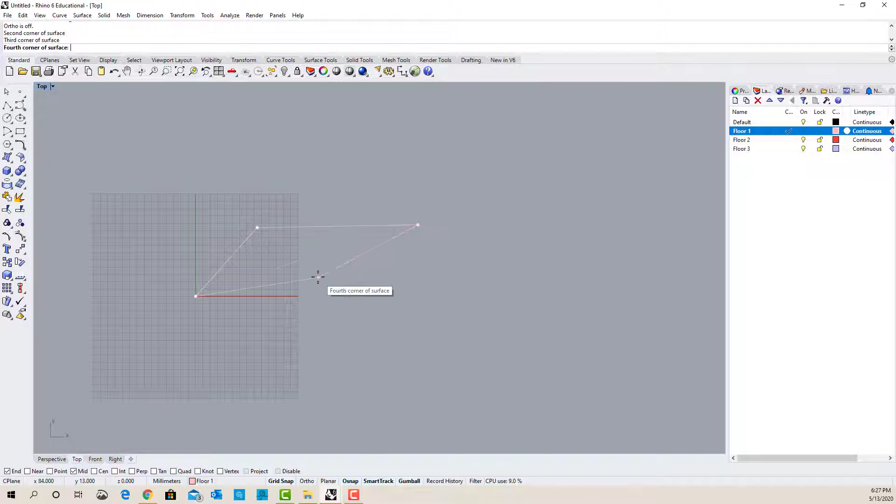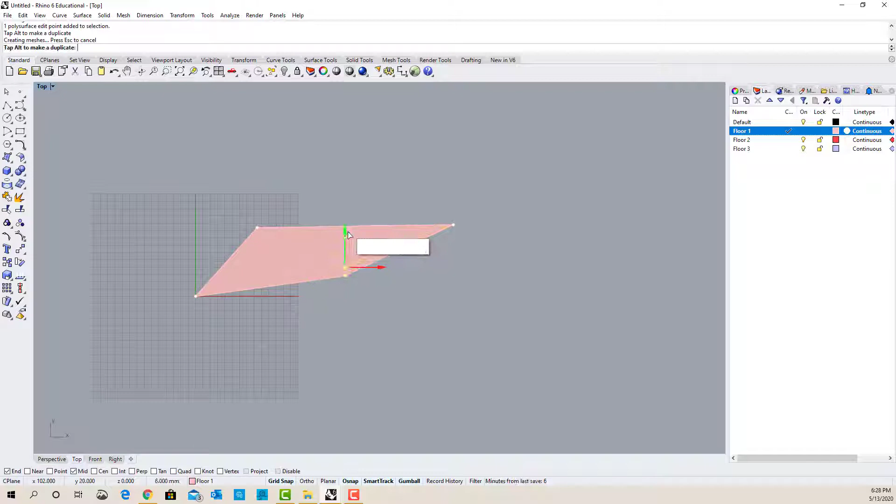Here's the first shape, and I'm calling that guy the first floor, of course. Solid, turn on points. I think I'd like to stretch this out a little bit more, make it more dynamic. A little bit longer, so the proportion is more of a 3:1.

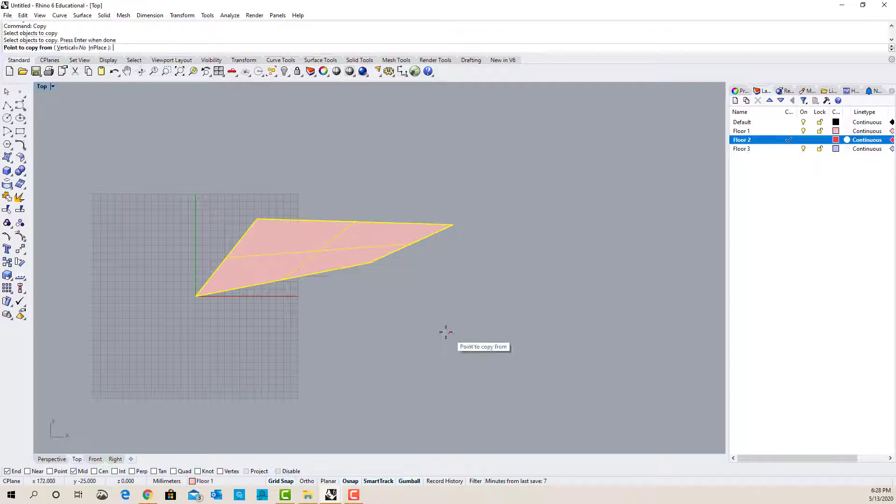Next, I'm going to go to second floor and still draw in the top view. I'm going to copy the same guy, and no matter how I move it, all those sides are going to be parallel, but I'm just going to concern myself with making these two sides parallel. Let's go ahead and change this to floor number 2.

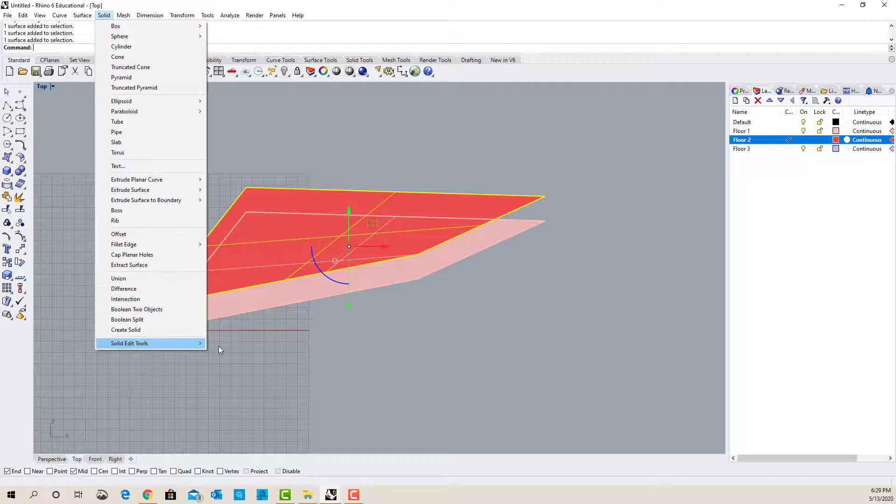Now you can see them both on top of floor 1, floor 2. I'm going to keep these two parallel, so I don't mind distorting the second floor now. Let's go to solid, turn on points. I'm going to grab this point and stretch it out a little bit like so, making it a little different from the one below it.

And go ahead and stretch this guy this way maybe. Okay, and I still have a pretty dynamic shape right there. So maybe this is where that is. I'm just teaching you a technique, not design, just a method of how you can do your 101 design.

Next, I'm going to go ahead and copy this guy, same thing. I think I want to make this edge parallel right there, so I'm going to offset it a little bit like so.

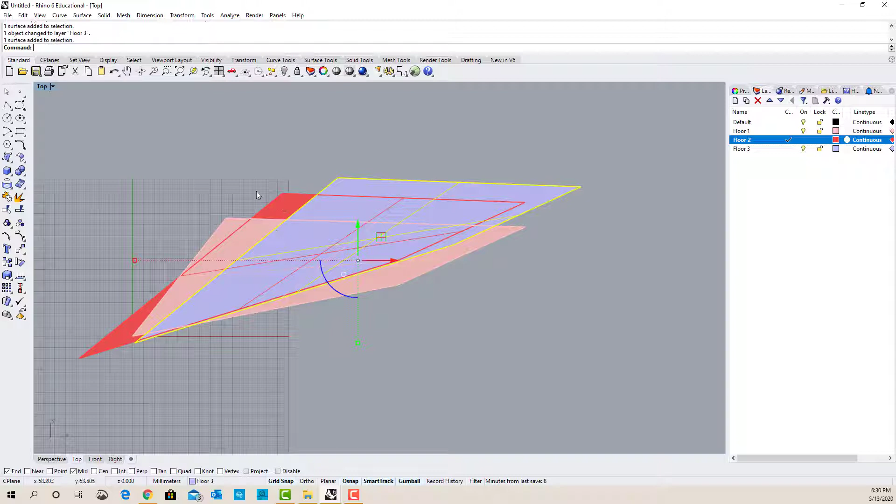Okay, let's grab the last one up and make that into floor 3. I'm just making different colors as a technique so I know which one is which level when I look at my index right here, which happens to be my layers. Grab the third level that you made and make it a slightly different shape from the second level.

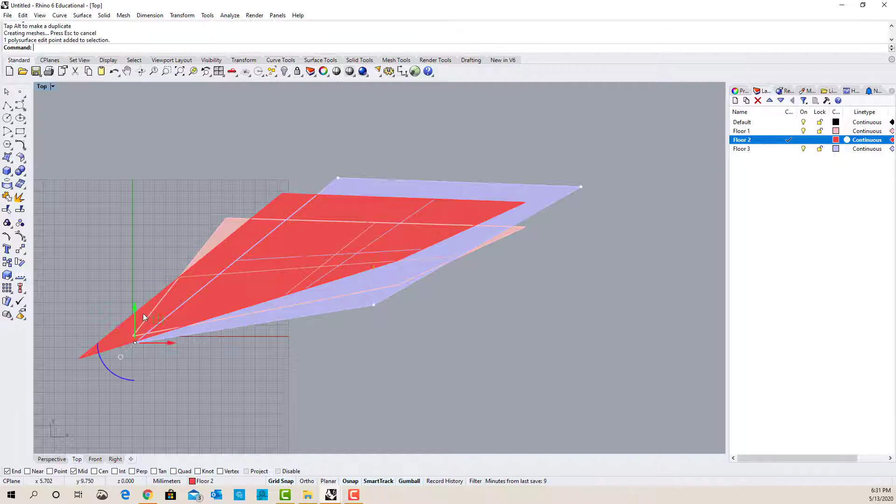So I'm going to go to solid, turn on points. I'm not going to touch these two points because I want it to remain parallel to the red line below it. I'm just going to grab this guy maybe and exaggerate this way a bit. And how about since everything is pointing this way, I'm going to take liberty here to do an opposite condition.

So right after you're done with this, let's go to perspective. After you go to perspective, make sure you're in shaded mode. Now you're going to grab each one of these and lift them up because right now they're flat on the floor.

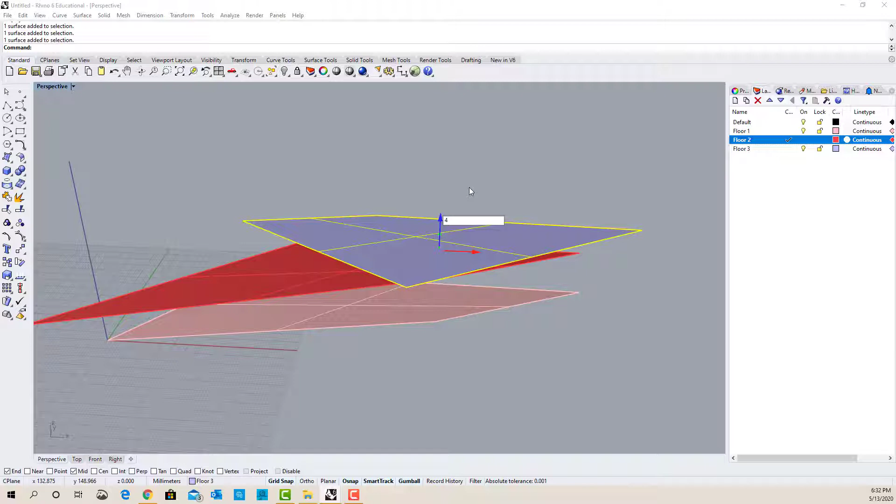So let's grab the third floor and second floor. Let's go ahead and move them up, maybe a little more. That seems reasonable right there, and I'm going to do the same thing for the last one, the third floor. I'm going to go 4 inches. They have to be really equal, so whatever height is required of you in 101, make sure that they're consistent between each other. Equal height, equal height.

I think in your 101 it's going to be 16 feet. This is just a demonstration of a technique. If you remember, we made this edge, kept this edge parallel to this edge, right?

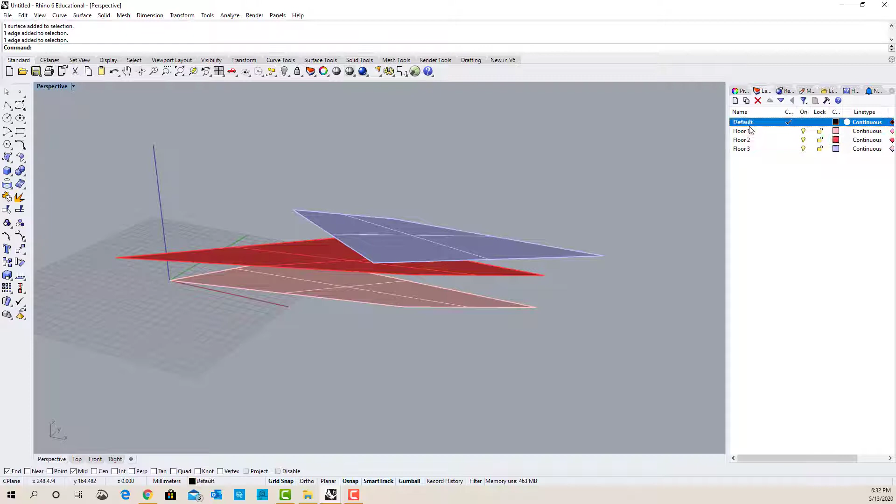So since they're parallel, I can go ahead, I'm going to do a different color here, and draw a four-sided polygon, and it will not be warped. Now I have one plane, turns up and becomes the second plane.

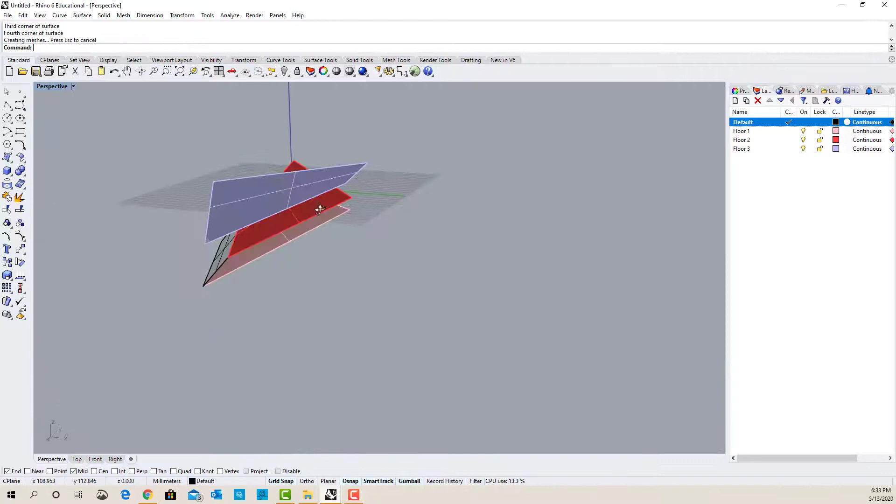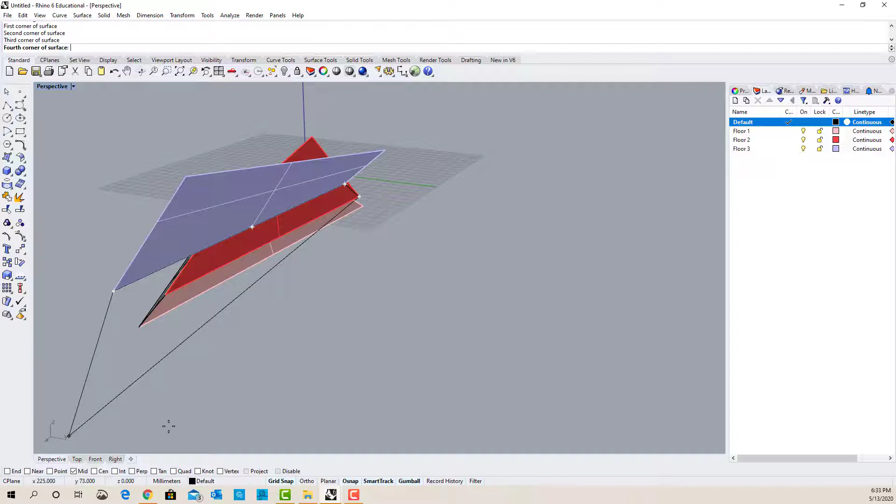It's all continuous. And if you remember also, we made this edge parallel to this edge. So I'm going to do a polygon there, but I'm not going to do it all the way through. I'm actually going to go ahead and maybe start from the bottom, go to the top edge, and maybe go all the way out and then go to the midpoint of the red line. Let's see what happens here. Okay, and there we go.

Again, you have your floor, goes up to the second floor, folds and goes up to that wall, and folds back horizontally, becomes the third level. And that's just one technique. You can go ahead and join everything right here.

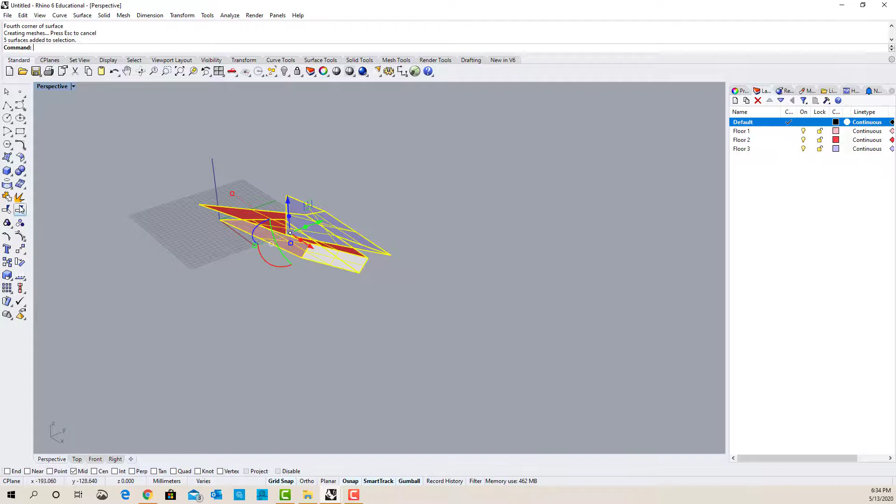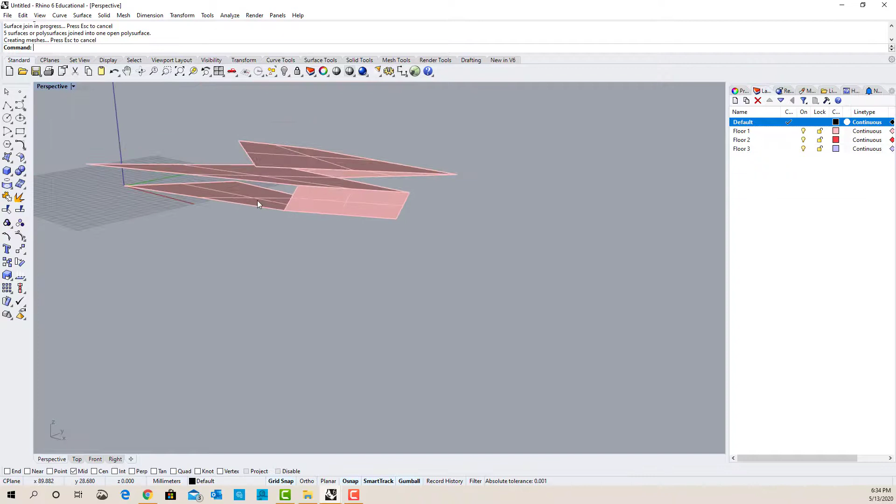Once you join it, you can again manipulate it by turning on points. For example, if you really don't like something, you just turn on point and stretch. Just make sure that you're grabbing parallel to your gumball. Okay, so that's one method right there.